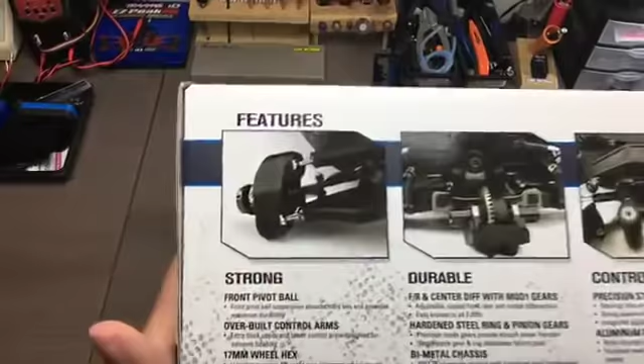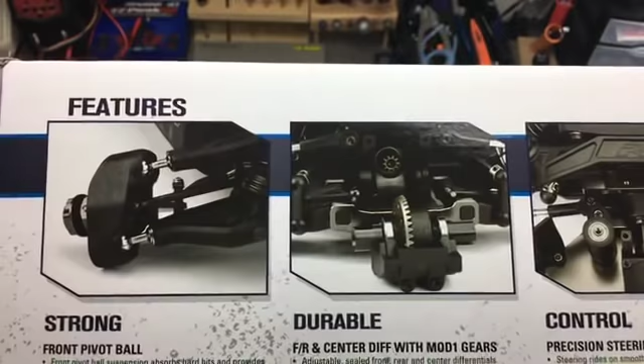So you've probably seen in the post we did at RC Car Action and in the teaser video, or the full video on Friday on the Facebook page, you've got pivot ball suspension with 17mm hexes. Front, center, and rear differentials with Mod 1 gears, that's 25.4 pitch. Hardened steel ring and pinion gears and a bi-metal chassis.

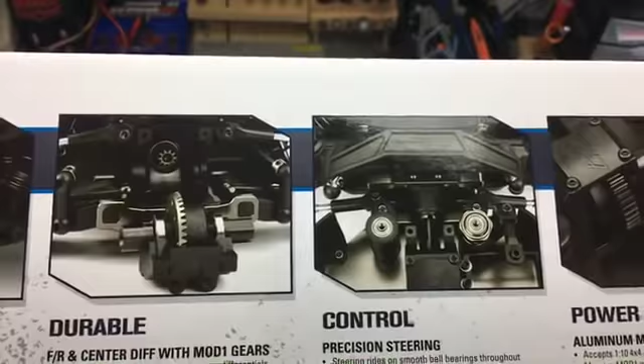6061 T6 aluminum chassis with hardened steel center spine. Tough stuff. You've got an 8-scale style steering rack there with aluminum pivot blocks. Aluminum motor mount system that accepts 1/10 4x4 and 1/8 motor systems and Mod 1 gears. Again, that's a coarse 25.4 pitch, so extra strong stuff in the drivetrain. Chassis layout provides ideal weight bias.

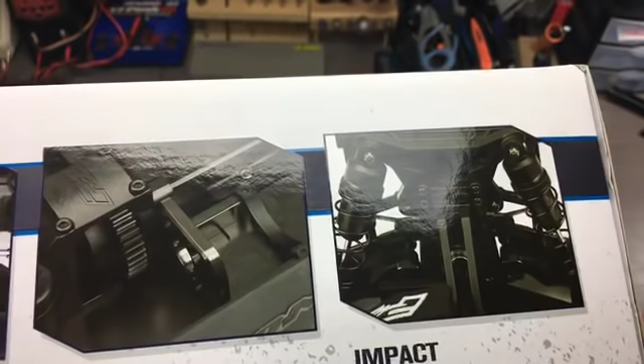16mm bore shocks, hard chrome coated shafts, durable X-ring seals. So definitely a well-spec'd kit from Proline here. This is their first four-wheel drive model. We've seen the Pro Series two-wheel drive models in short course buggy, short course truck, and two-wheel drive monster truck versions, but this is the first 4x4.

The body style is pre-cut Sentinel clear. This does come with Badlands tires on F11 wheels. Look at the specs here. This guy is actually about a half inch longer in wheelbase and a half inch wider than a Stampede 4x4 from Traxxas, if you want a size comparison.

So it is 1/10 scale. It's not an 8 scale model. It's built 8 scale style, but dimension wise, definitely 1/10 scale.

But let's get into that box and see what's cooking here. And I will confess I've already been in here to snip some zip ties and just make things a little easier before I tear into it, without fumbling for X-Acto knives and scissors and stuff. But this is what you'll see when you open up the Pro MT 4x4 box. We'll get to the stuff in the bags later. You're gonna get a manual, decals, and window masks and stuff. But let's get right to the star of the show here, which is the truck itself.

It arrives with the tires unmounted. You get these nice Badlands on F11 wheels. 17mm hex in there. You can see the bigger axle opening. So some serious rubber right out of the crate. I reviewed these on a two-wheel drive Stampede. They have a great moto look and they move a lot of dirt. Nice tires for sure.

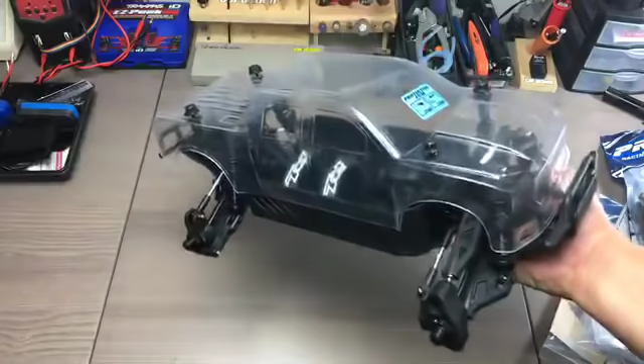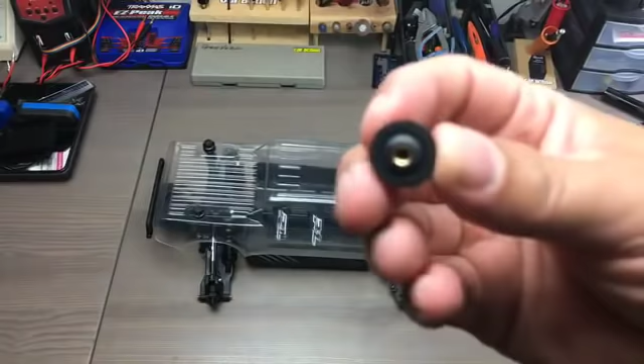So here is the Pro MT 4x4. As you can see, it's got Proline's secure lock system. Instead of body clips, you've got these threaded guys. And I like these a lot because they don't pop off in a crash or get bent up. You can buy these caps separately if you do manage to lose one of them, or if they wear out or something happens to it. Let's pull these off.

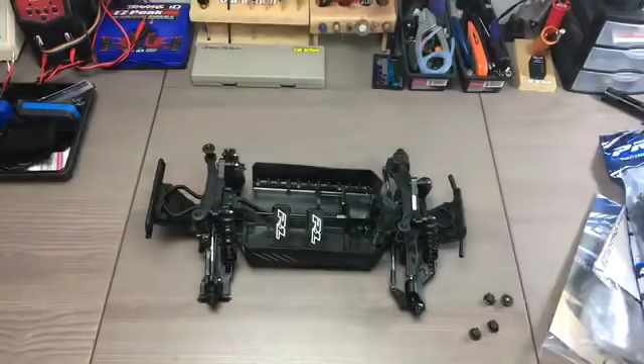As usual, Proline does a nice job with the body. You've got overspray film on there. It comes with window masks and decals, pre-trimmed, which is always great. This will look great finished even just one color, but I'll see if I can spray a couple of colors on there. Not a great painter, I'm a rattle can guy, but truck bodies with these nice smooth slab sides are pretty easy to mask and get a nice looking design on them. So I'll get to that tomorrow.

As for the truck itself, yes Jason, it comes assembled as you see it. I'll do my best to look at these questions and comments on the phone. It is a little awkward to do both, but bear with me.

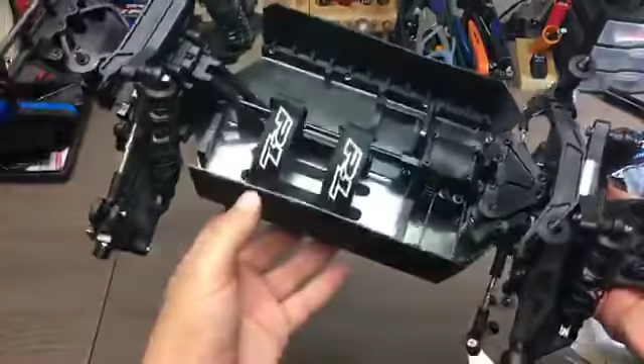So you've got an aluminum chassis here, and it's hard to see in there, but there's a black part that's a steel spine running the length of the chassis. You've also got bracing over here, and of course the whole steering assembly also serves to brace the front of the chassis. The chassis is 6061 T6 aluminum. You can see the thickness there. Let me push this arm up.

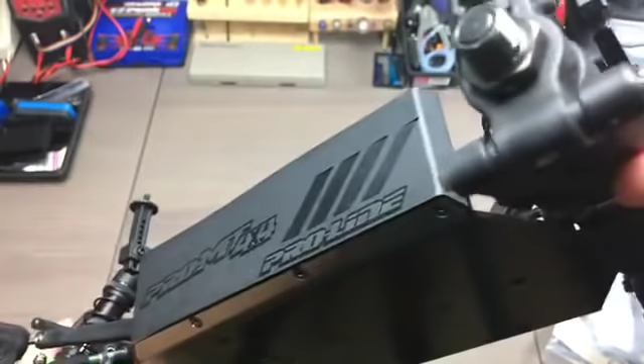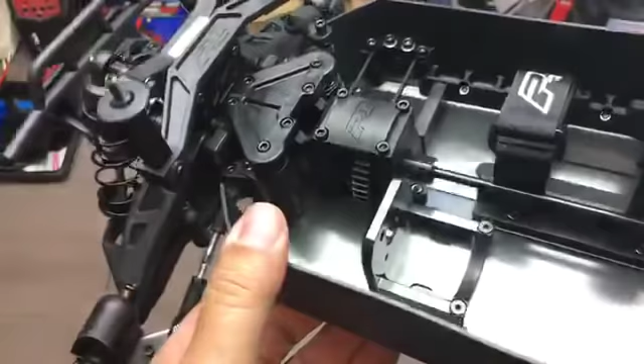So this should be a pretty rugged ride. You have an aluminum motor mount here, and as you can see, it reaches down on the chassis, so it's extra rigid, so that motor isn't going to flex around on you.

And the mount does not have any kind of a cam on it. It's just a flat piece of machined aluminum. So to adjust your gear mesh, this whole cradle moves side to side.

And when you look under the chassis, you can see these inserts for the motor mount screws right here. These can be flipped around, and there are additional inserts in the parts bag that will preset the gear mesh so that you don't have to monkey with it. Just put in the appropriate inserts for the tooth count or the pinion you're going to use, and the mesh is set automatically.

And the truck does include a pinion. It's a 16 tooth, and it's all Mod 1 gear, so you can easily get pinions for this.

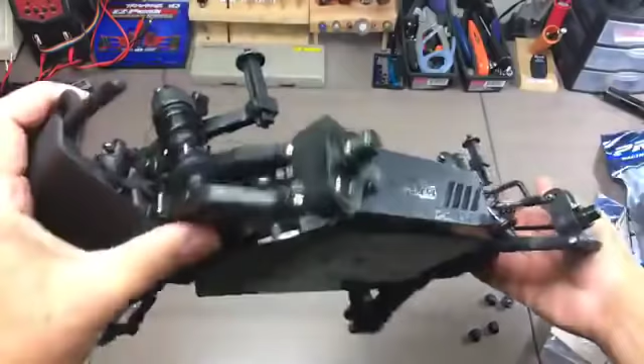And in this underside view, you can also see how thick the suspension arms are. It's a 1/10 scale truck, but in terms of the thickness of the arms and the way they're molded, it's a very 8th scale look. Also the turnbuckles, which look to be about 4 millimeters thick in steel.

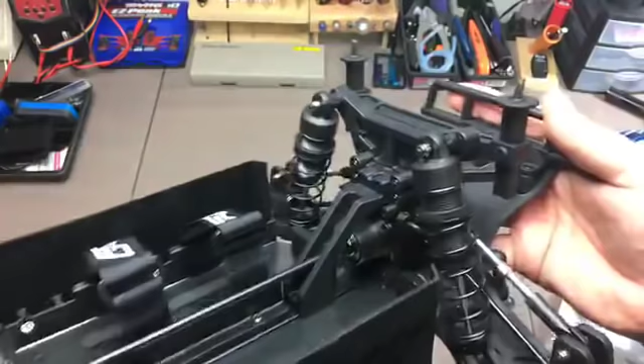And you've got 16 millimeter bore shocks. These have hard-coated chrome shafts, X-ring seals, Delrin pistons in there, so really high-quality shocks. Same type of spec that you see on the Proline Pro Spec shock.

Good stuff. Sway bars are installed front and rear. If you look at the Proline website, they show this differential coming out very easily. It's a few screws, and then that cover comes off so you can access the diffs. I think it's 1,000 weight oil from the factory in there, but they are sealed to hold oil, and they come oil filled out of the box, so you don't have to degrease them.

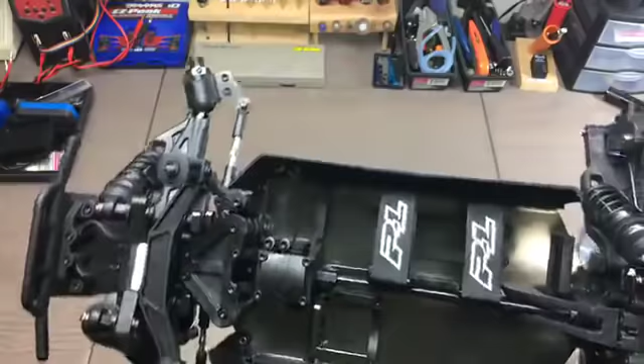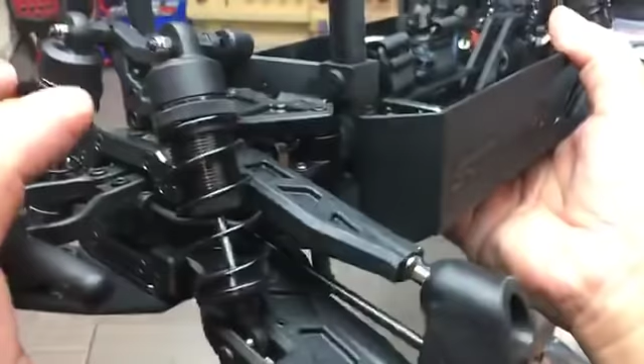Okay, let's look at the front suspension here. We've got pivot balls, and I'm going to interview the design guys at Proline for the review in RC Car Action, but I suspect that the pivot ball is there because Proline's really going for a super durable truck with the Pro MT 4x4.

And with a pivot ball, you've got this massive plastic molding here instead of a C-hub and a separate steering knuckle. With this design, the steel balls in there have a lot more surface area than hinge pins would. And if you've ever crashed an RC truck, which we all have I'm sure, very often the hinge pin will just kind of rip through the suspension arm.

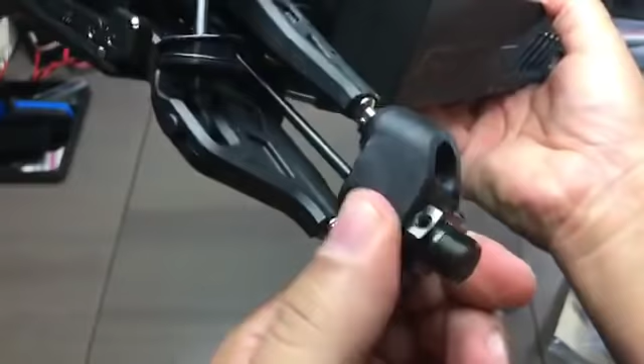So these pivot balls will be more resistant to that. Then, because the pivot balls allow for up and down movement as well as steering movement, that means you can also flex these backwards more easily, and it's not going to actually break anything. You've got plenty of room there for stuff to move around in a crash.

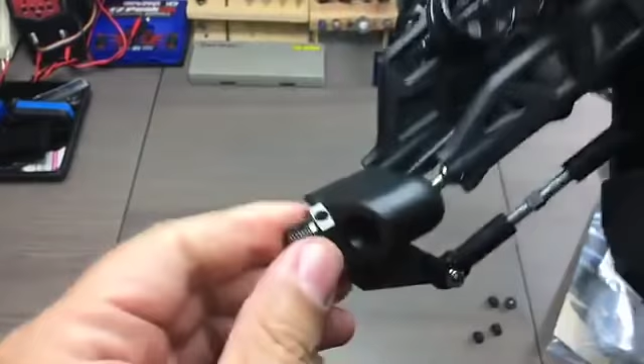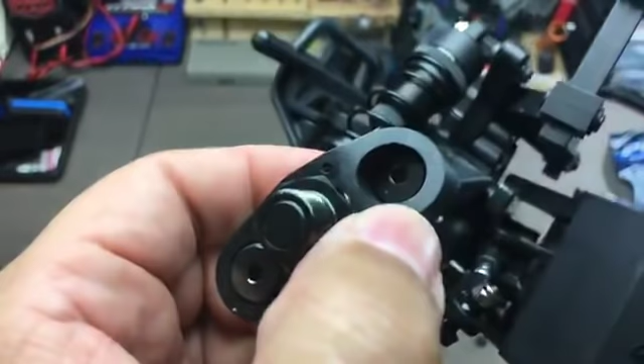And the steering hub here is designed with a separate arm in aluminum for the part that the tie rod actually attaches to. 17 millimeter hex hubs. You can see the adjustment there, so you can adjust how much tension there is on that pivot ball and get it just right where there's no play but also no resistance.

And there are Delrin inserts in there that actually ride on the pivot ball, and you've got the aluminum cap that holds that in place.

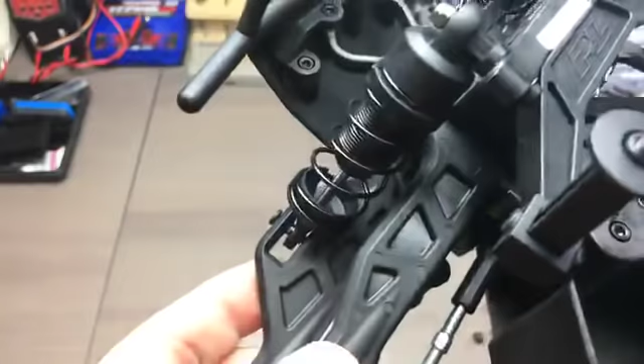Upper arm is fixed because you can just adjust the pivot balls in and out if you want to set track width. You shouldn't really need to though. These appear to be just bottomed out. There's a spacer on the lower one to get the camber set properly, but it's easy to adjust as well. You shoot an Allen wrench in there and you can adjust your camber.

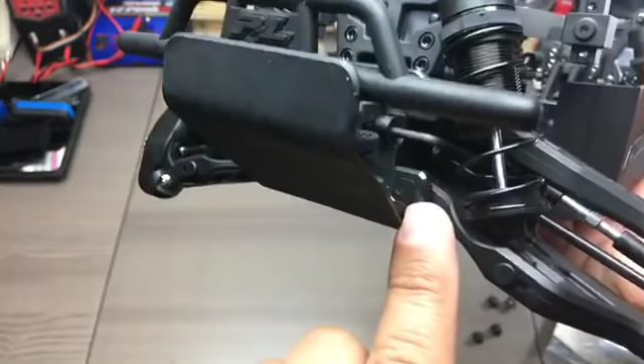You can also see there are inserts for the hinge pins that will set the kick up, and that should also be in the rear to set anti-squat. So while most people will probably just put electronics in this and go ahead and hammer on it, and that's what I'm going to do, there is a lot of adjustability here if you want to really get into tuning this thing up.

You can set camber, of course, toe in. You've got your steel turnbuckles on the tie rods and on the camber links. You can set the hinge pin angles. You've got front and rear sway bars to work with.

In terms of chassis layout, you can see the front differential is pushed way up here. That way you've got plenty of room for your motor and your speed control on this side. Battery pack over here. And the straps, you can see, are pretty tall there, so there should be no trouble putting a big battery in there, whether you want to go for a whole bunch of capacity or if you want to do 6S.

This truck is built to handle it. I'm not going to go that big because it's just too much. I think it's not really fun. You're just ballooning tires and tearing stuff up, and it's fun for a speed run and as a novelty thing, but for regular running, I think 3S, 4S is definitely going to be the way to go for this. Really tall chassis guards here to keep dirt out.

What else can I tell you? Sorry there, Almog, David, Cohen, I know you want to go to sleep. This will be available to watch later too, so don't worry if you can't hit it right now.

It's full ball bearing, of course. You've got a lot of adjustment on those body posts there.

They arrive preset for the Sentinel body, but whatever you want to put on there should be no trouble. If you want to do a tall SUV style body, Proline has longer posts that you can drop in there as well.

Overall, fit and finish is really nice. I mean, it's another Pro Series kit from Proline. These things are really well detailed. You can see the servo mount here is all metal. Just first class stuff. Proline does a really good job with these models.

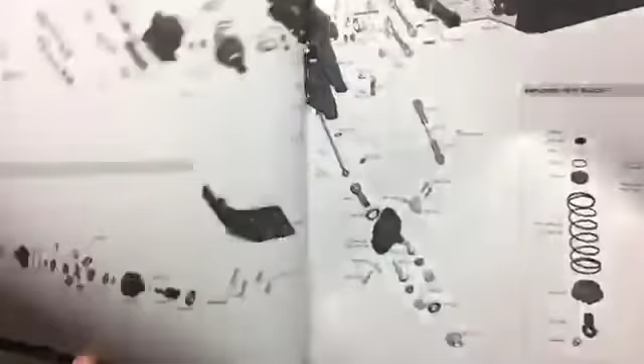You got some tips on painting the body. Mine won't come out that good. Exploded views. Let's show some of the stuff off there.

There's your suspension assembly. And you can see your differential here. You've got 4 spider gears in there. And you've got gasket and O-ring seals. All steel gears for the ring and pinion. And the center gear is molded. These are all Module 1, which is 25.4 pitch.

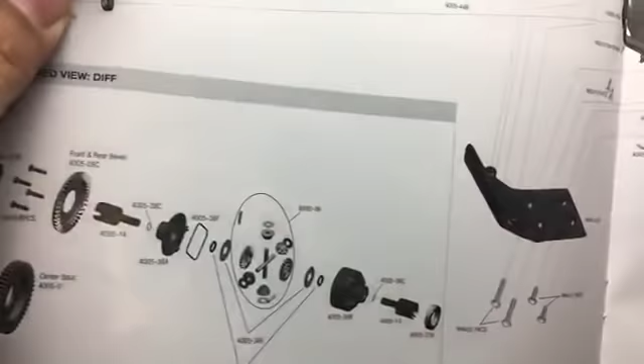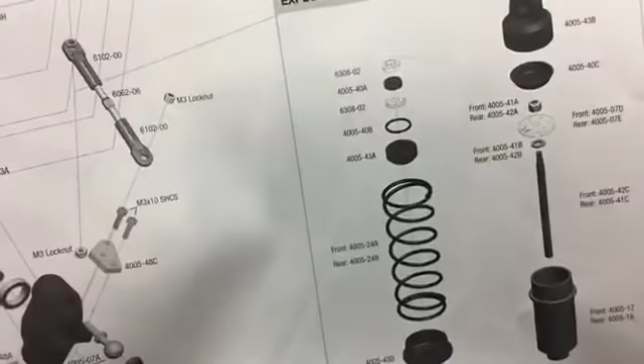Here's your shock assembly. Looks like you've got a single X-ring in there, like with the Pro-Spec shocks that Proline does. Bladder equipped. The shocks do arrive filled, by the way, and the build job is very nice. Give them a few pumps and they're perfectly ready to go. Here's your chassis. You can see how that spine deal works.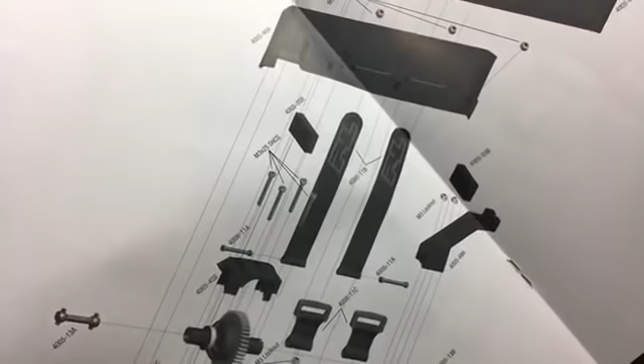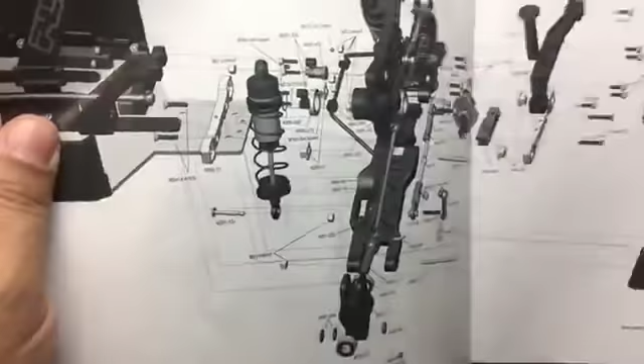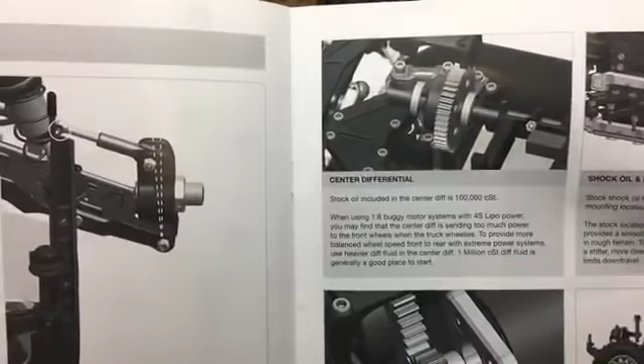More exploded views. You've got tuning tips here, which is great. We talk about caster, your wheelbase adjustment, camber, center diff, gear ratios. Like I said, the gear mesh is preset, so that's very fuss-free.

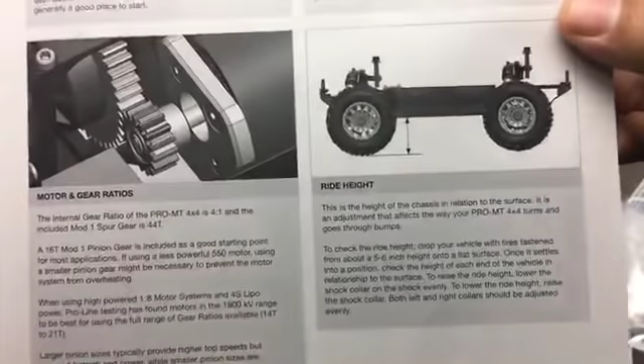And it does include a Module 1 16-tooth pinion in the kit. Ride height, shock location, all the usual stuff that you adjust on a car. Naturally, there's plenty of tires from Pro-Line available for this as pre-mounts.

You can get different body styles. This is the Ford F-150 and the Silverado that they're showing here. And nicely done stuff from Pro-Line. We'll take a look in the parts bag. And let's see if we can cut this open.

So we've got spare pistons here, and these are 16mm bores, so it's a nice big piston. And that's Delrin too, so it's very slippery and slick, nice action.

These look like extra links for the sway bars, not the dog bones. I should mention the truck does not have dog bones.

In front, you've got CV style shafts, if I can get in there. You can see that there. And it looks like this design uses the bearing to capture the pins, which is always nice. And you've got them in the rear as well.

All right, back to the bag. Here's your wrench for the wheels.

Some really thick horns here for the steering servo that you install. And these should be 23, 24, and 25 spline, I would think. 25, 24, 23. So whatever you've got for a servo, you'll be able to use.

Here are the axle nuts. You can see they're serrated so they won't loosen up on you. Inserts for the gear mesh setting system.

Got some foam padding, some additional hardware. There's your pinion, it's set up for a 5mm shaft. And you've got your motor mounting hardware.

Another truggy, says Jerry. I wouldn't really say that because it's 1/10 scale, and you can make a 1/10 scale truggy, I guess, but we tend to associate that term with 1/8 scale models. This is very definitively 1/10, and not just because of the body size. The chassis roughly tracks the Stampede 4x4 size. It's actually got about a half inch more wheelbase, about a half inch more width, so just a little bit bigger, but definitely a 1/10 scale truck, which I really like because as much as people like 8 scale, and I do too, a bigger model is going to be more expensive.

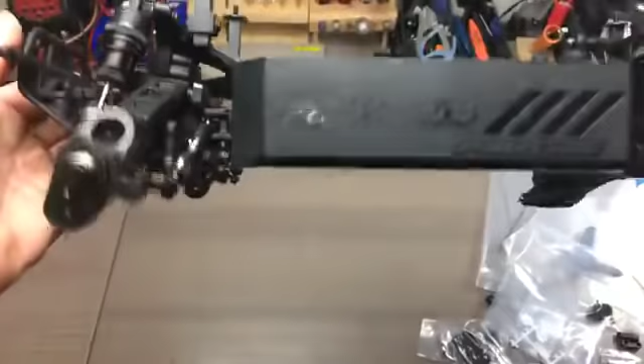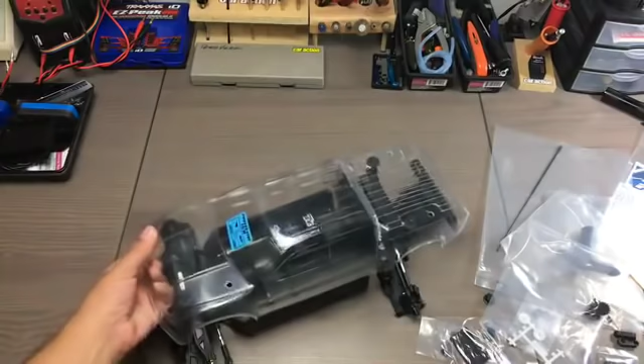Let me get this body.

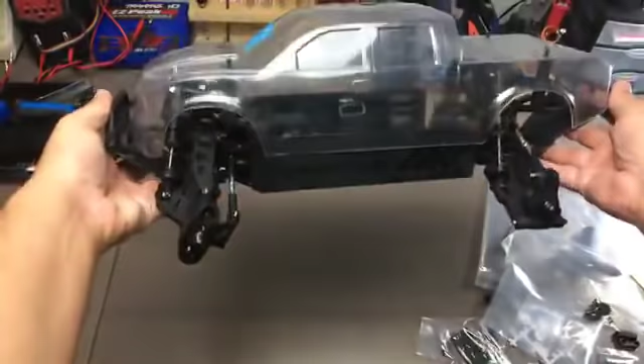So when you've got the body on, those side guards will fill in that gap. It's not available just yet, Heath, unless things have changed at Proline. It is $425 right now at Proline.com, but I don't think it's shipping yet.

I don't think you need to upgrade it, Sean. You've got 16mm bore aluminum shocks right out of the crate. Sway bars are on it. It's got steel turnbuckles, which I'm going to say are 4mm thick. It's full ball bearing, with an aluminum motor mount and aluminum steering servo mount. You could put titanium turnbuckles on instead of steel, I guess, and there's probably even fancier shocks you could put on there. It's got CV-style drive shafts right out of the crate. So I don't know what kind of big swipes you need to make as far as upgrades on this. You can dress it up with colored hardware and stuff, I'm sure, but out of the box, it's ready to go hard for sure.

Yeah, the tub will also keep stuff that flies in there from going further. But it's shaft drive, which is great, so you don't have stuff fouling up a belt. That's why all of these cars are typically shaft drive. And you can see the back of the chassis is just open, so anything that collects should also slide back out. But with any vehicle like this, between runs, when you're making a battery swap, I always just turn them upside down, give them a good shake, and all kinds of stuff falls out so it won't be getting into your gears.

I don't know how long before it's released, Heath. I've got to ask Proline that. I'm sure they want to kick them out as soon as they can to get you guys hooked up. You know, I don't have a motor recommendation, but the manual does, so let's take a look at that.

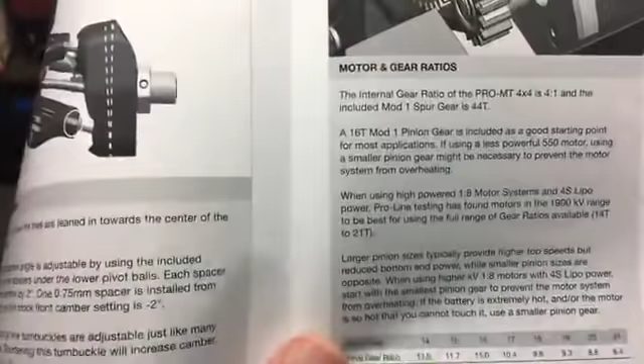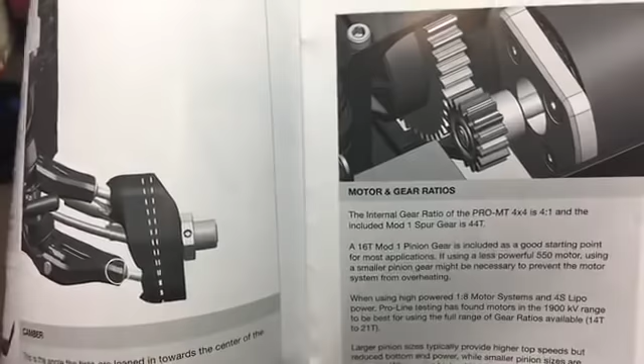Okay, now we wanted to look at motors, so let me flip to that page in the manual here. All right, so here's your motor and gear ratio info. Let's see, internal gear ratio is 4:1, and the included Mod 1 spur gear is 44 tooth with a 16-tooth pinion. When using high-powered 1/8 motor systems and 4S LiPo power, Proline testing has found motors in the 1900 kV range to be best for using the full range of gear ratios available, which is 14 to 21. There you go.

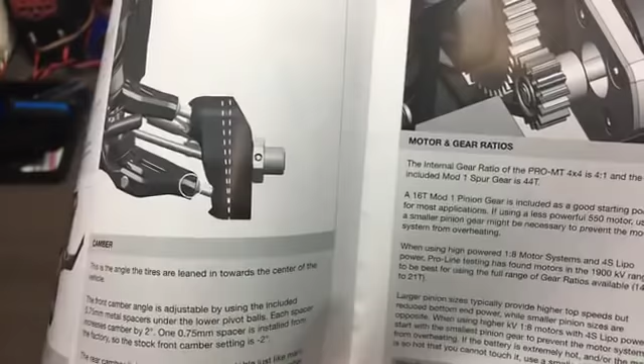According to Proline, it's very easy to get to the diffs. You pull out a few screws, and then the diff opens, kind of clamshell style, to let the diff gears out. And if you go to proline.com and look at the pages for this car, they've got photos of that diff coming out.

So it's smaller than the Slash 4x4, but bigger than a Stampede. That's true — the wheelbase and the width are about a half inch bigger than a Stampede 4x4. The wheelbase is 11.2 inches, or 284 millimeters. So that is going to be shorter than a short course truck, which I think are about 13, which is just normal — that's just how big short course trucks are. So this is a 1/10 scale monster truck. It's not significantly bigger or smaller than any other 1/10 scale monster truck that I can think of, at least as far as trucks that are 1/10 scale all around, not just a 1/10 scale body with a giant chassis under it.

It does include wheels and tires. You've got Badlands. Let me open these up.

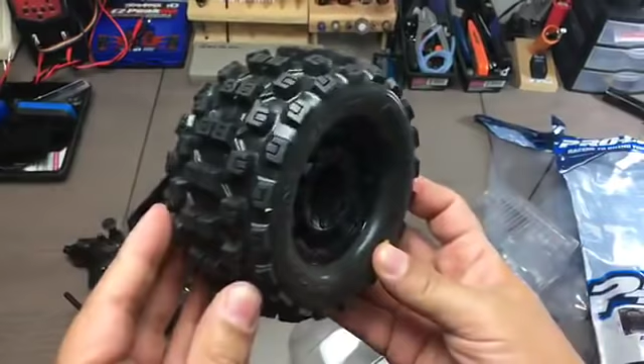So here's your Badlands tire. This is probably my favorite Proline tire because it looks like a motocross tire, and they move a whole bunch of dirt. The F11 wheels look great. You can see a big opening there because you've got a 17 millimeter hex.

As usual, Proline does a great job. Bodies and tires, you're not going to beat Proline. And the truck really matches the quality of the body, wheels, and tires that Proline does. They have not skipped any beats there.

Yeah, they are aggressive. These are good. And naturally, running on the street tends to chew up your knobs, but when you've got a really big knobby like this, these guys actually hold up pretty well. It's not like a pin spike where you run around the neighborhood a few times and it's a slick.

Great job, Matt Wallace is right. I've got to interview Matt and find out about his insights on designing and getting this truck out the door.

And here's that Sentinel body again, which kind of hits all the greatest hits of modern truck styling. Because it's not officially a Ford or a Chevy or anything else, that also keeps the price of the truck down a little bit. Not that it's inexpensive—it's a $425 model, but you're getting top-notch everything.

This is not a truck you're going to be upgrading anytime soon, at least not because you need to. If you want to put stuff on there, great, but out of the box, it's really got everything.

Optional parts—I'm not sure what Proline would offer for an option on this. I mean, they could do stuff like aluminum suspension arms, aluminum shock towers, and dress-up kind of stuff. But I can't point to anything on the truck where I would say, oh yeah, that's something I would change. Maybe Proline will do a steel spur gear or something like that, but it's really well equipped. I don't think there's any spot I would immediately jump to.

These hinge pin brackets are machined aluminum. It's got the sway bars, aluminum back here too. You've got the CV drive shafts in there, plenty of adjustment on the body post. It's got the secure lock system instead of body clips. And it's really got everything.